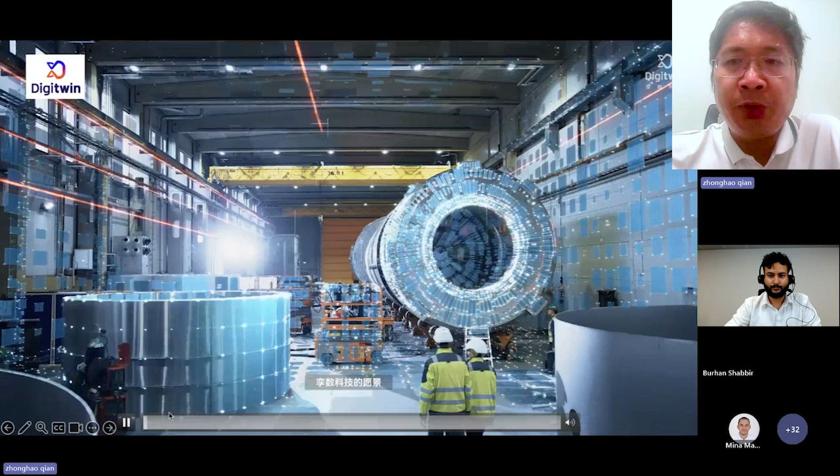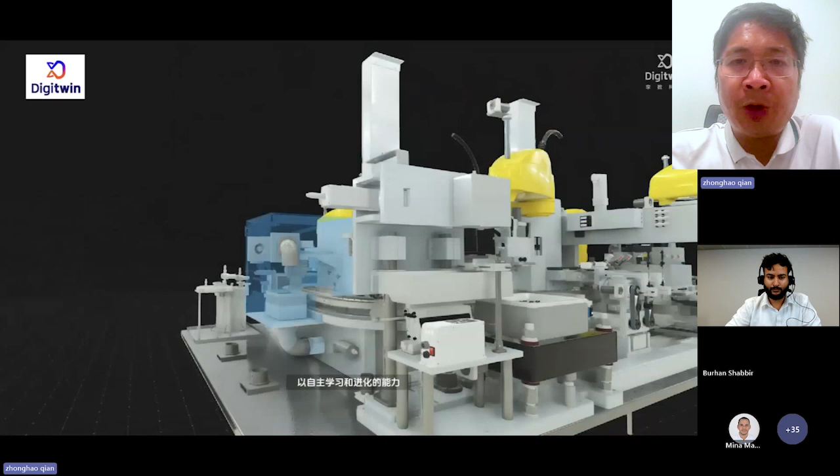First, a short video introduction on what we do, especially in manufacturing industries - within all the stages of manufacturing, from design, machining design, to operation, and also to sales. We provide different tools to create these applications easily and cheaply. This is basically what we did in warehouse management, in ports, and in oil and gas as well, and also on new concept validation with large language models.

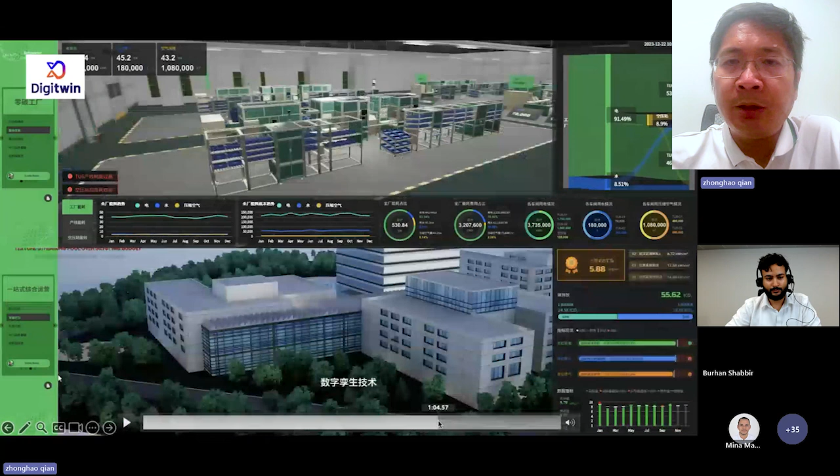We have included this latest cutting edge technology into our solution.

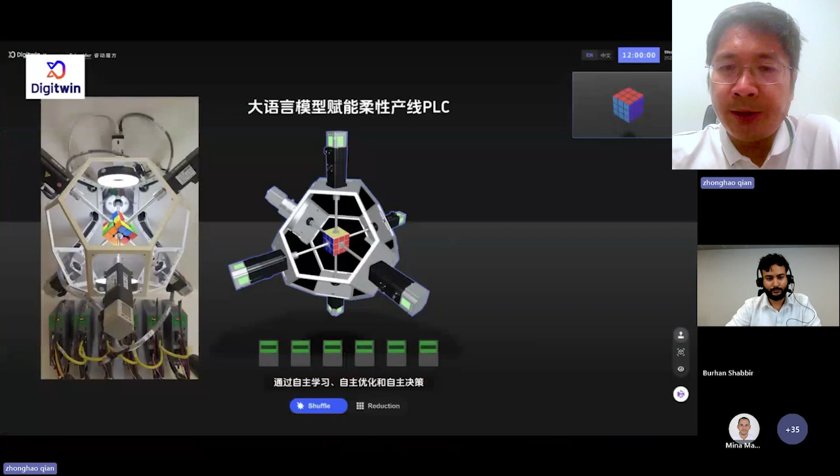My presentation will be separated into three parts. First, I will introduce the key features of our products, what a digital twin is, and what's the key technology behind it. Then in the second part, I will introduce our two solutions on oil and gas, and also on port operations. The third part will introduce some other cases, and our capability to execute international projects we have done in the past few years.

So first of all, the key features of digital twin technology. We have concluded this in four words: anytime, anywhere, anyway, to anyone.

With digital twin technology, you can experience the digital world at any time - you can replay the past with all the data, monitor the present, and also predict the future. You can also do it anywhere, no matter where your operations are, either in desert, in ocean, or in space - you can understand and manage everything.

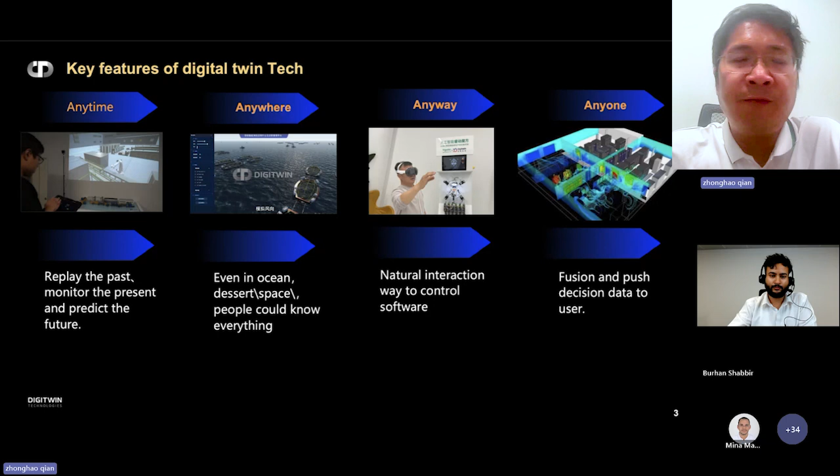And anyway - you can use different human machine interactions, including AR, VR, pads, iPhone, or the traditional PC - and also to anyone, so different people can have different interactions with the system depending on which level they are. If you are an operations person, you can have first-hand information, but if you are a manager, you can also have a more global picture of your operations. This is basically the key feature of digital twin technology, and we do it through 5 ways. First, we can sense through all sorts of IoT and other digital systems.

So we connect all these systems and compute with the help of simulation and mechanical models plus AI models, and we restructure this information into a more understandable way, so that different people can interact and collaborate on the same platform. We call it basically an industry metaverse.

So this is our platform, we call it the Twinverse platform. What we do is connect different types of data. I'll present in the next slides all the different types of data, and we construct this data into twin objects. This is the main key element of a digital twin. Basically, we call it twin objects.

Then people can interact with these twin objects through a 3D rendering engine on big screens, mobile, on the web, or in AR/VR. So basically, you can experience this data and these twin objects through different ways.

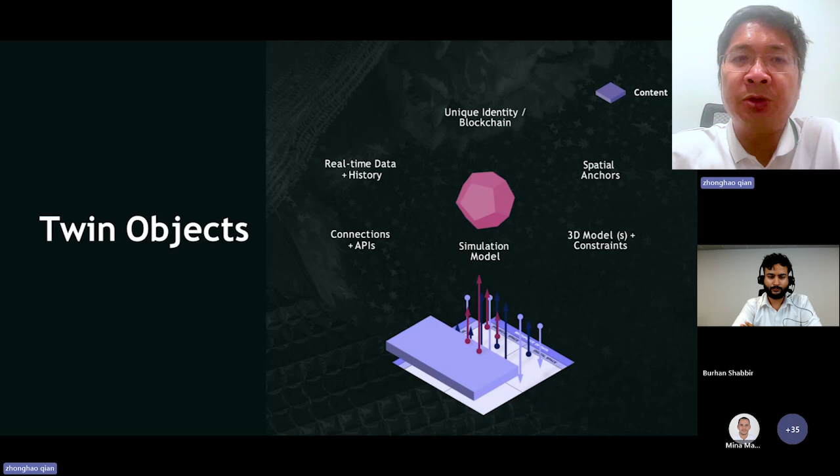Okay, then using our Twinverse platform, we have multi engines. So how we realize that people can use different devices to experience these digital twin projects - we have different rendering engines, like the Space engine, Flex engine, and Twin engine, which is our own rendering engine.

We can also integrate for more use cases like Unity or Unreal engines, and there are different deployment models, from client server, browser server, or streaming - like you can play it with videos.

So the purpose of all this technology is really to build a new spatial digital world by combining all these technologies to improve efficiency in the real world. So basically, we simulate all the stuff in the digital world, then we do the improvement in the real world, from, as I explained earlier, design to actual production to sales, marketing, and maintenance.

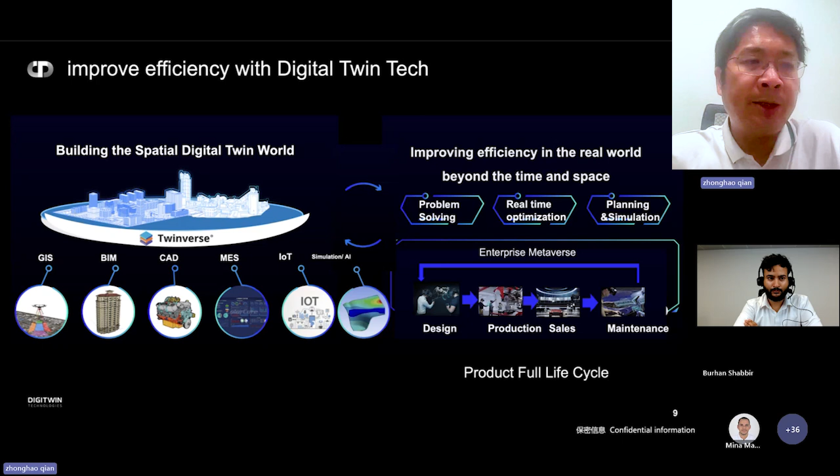Yeah, these are our main technology concepts. Coming back to our company, we are a leading provider in AI powered digital twin solutions in Asia.

Basically, we are headquartered in Shanghai. So since 2020 we have done a lot of international projects, especially in oil and gas and other infrastructure projects, to help our clients locally and internationally implement these digital twin projects.

And we have also been selected as a 2022 Top 100 Technology Startup by WEF, the World Economic Forum. So that's also quite a good recognition from the industry.

So our products, in summary, we have a platform project called Twinverse. The technology behind it I explained earlier in the first part, but we also have three main products that our users and clients can use easily.

So one is we call Quantum Foundry. People, our clients, can use this tool to create equipment-level twin projects easily. Second, Quantum City is more dedicated for large scale digital twins. We use this tool to create bigger things like oil fields, ports, or even city management. So we call it Quantum City.

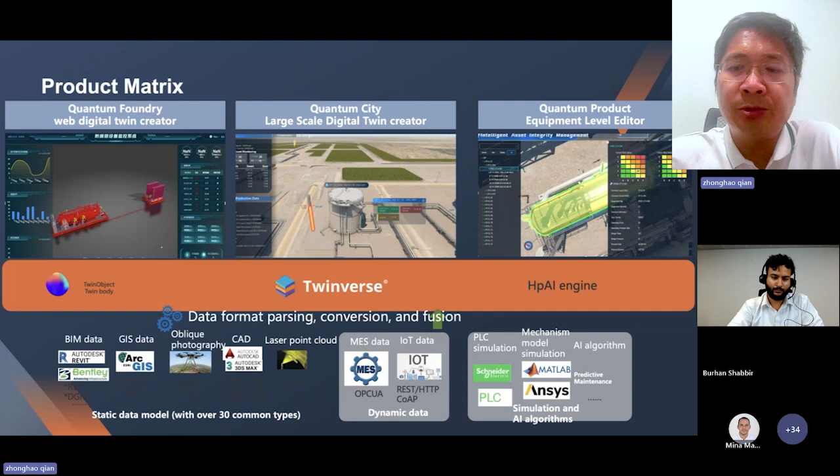Yeah, these are our product matrix, and we use these tools to deliver basically two parts. The first part is on the industry full life cycle, like energy equipment, railway, or marine equipment. So we can provide services from design to how people manufacture these equipments, to how they sell these equipments, and how they maintain these equipments.

This is one part. The second part of our solutions is basically for spatial complexes. So we do solutions in smart transportation, smart port, smart oil field, and also smart city. We can quickly do one 3D copy of the scenes or the spatial complex situation, and we connect all different data.

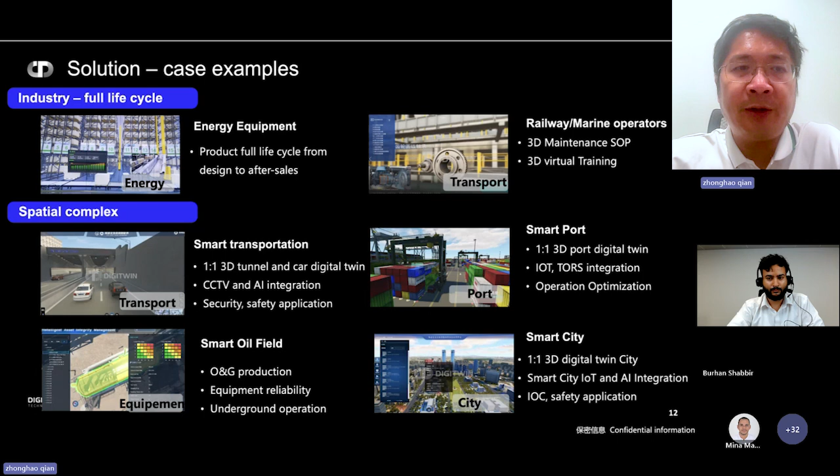Then we develop different functions for different applications, for example safety or equipment management, for efficiency data and analysis. So these are our products, the solutions we can deliver from here. Our clients include some European, some Chinese, and also some Middle East companies already, focused on equipment management, like port management or other industries, different industry types.

So for the second part, I will introduce the two solutions we have been working on with our different partners. The first one is oil and gas.

The complexity in oil and gas operations is, first of all, it's very big, as you guys all know. There are lots of different data developed by different operators, and it's hard to integrate into one platform. Also, the legacy infrastructure has normally been updated, but on the digital side, it hasn't been updated. Then we also have regulatory and safety challenges. These are the common challenges we faced.

We have developed solutions like surface and subsurface reservoir management. Secondly, we also did surface equipment management — this is also one of the topics we have today. We developed a whole solution on how people can manage their assets. Lastly, we also developed production and operation management, so people can enhance their operational efficiency and safety.

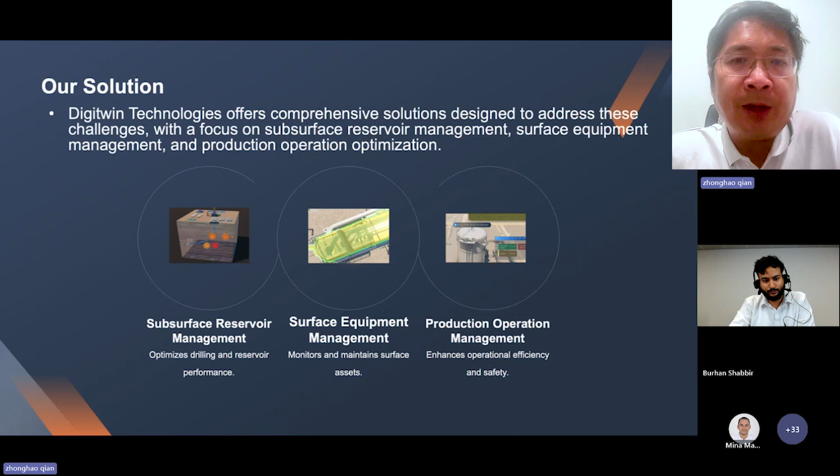I will go through the three parts of the solution, and there will be a small video we've done with different clients. First, we did this with PetroChina. This is one project in China where we've been helping them visualize the drilling process, and also integrate a simulation model to help them optimize their drill string combinations.

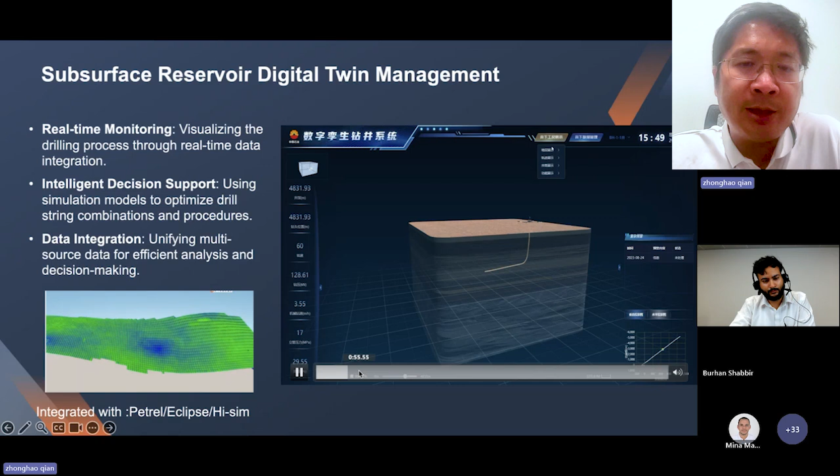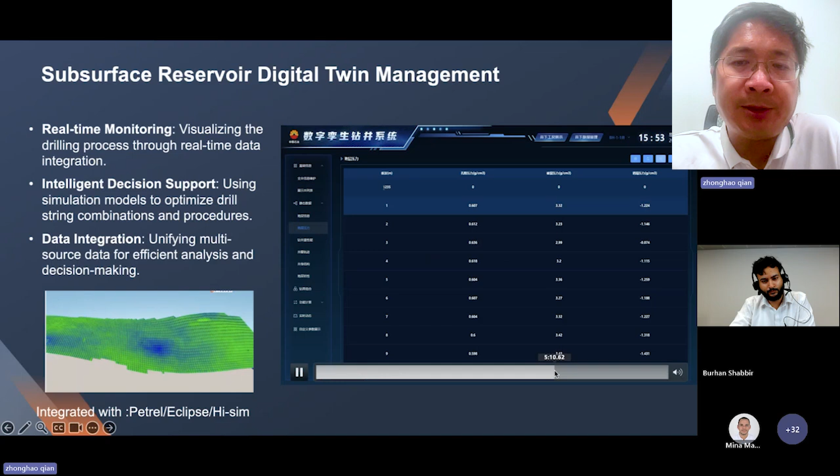In phase two, on the bottom left, we also integrated some simulation software like Petrel, Eclipse, and Hi-sim, which is PetroChina's own developed simulation tool. In this case, they can know the real status by combining these simulation results with their actual drilling process.

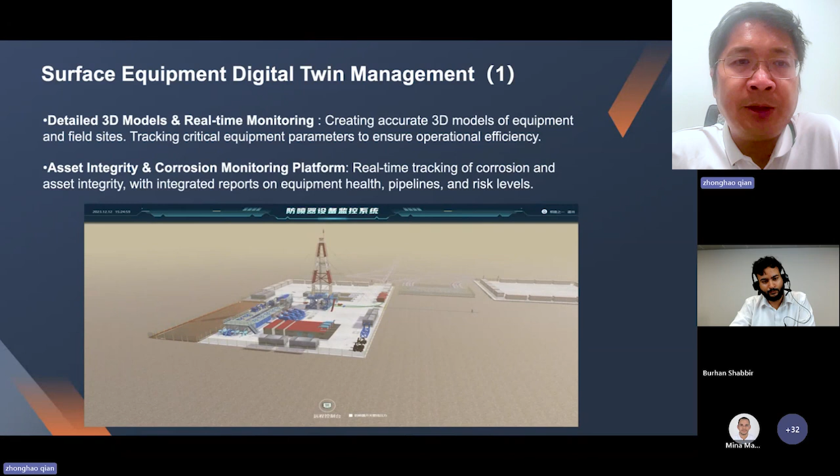The second one is on surface equipment management. This is also one project we've done with PetroChina. We helped them create 3D drilling facilities on the surface, and also monitor key equipment performance.

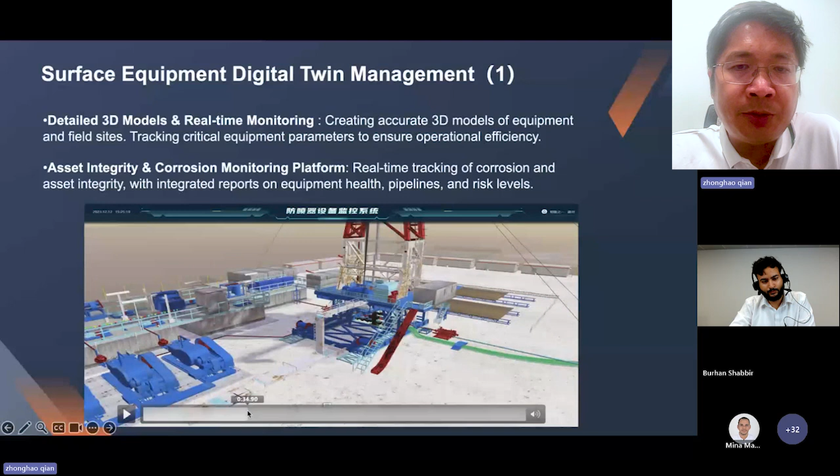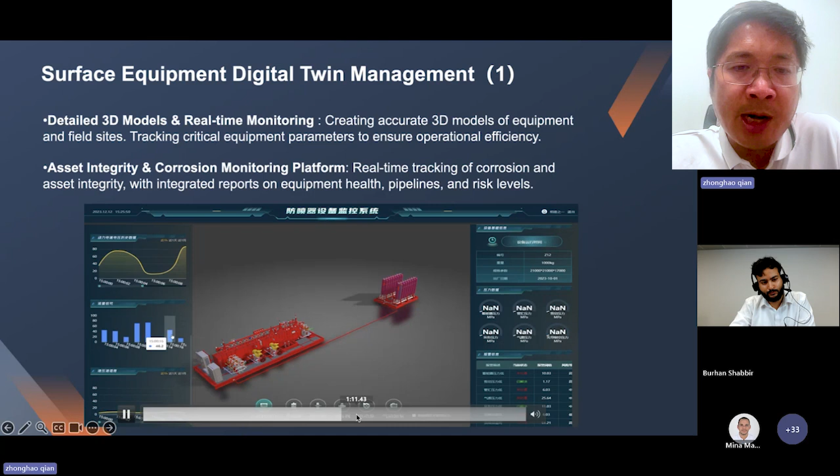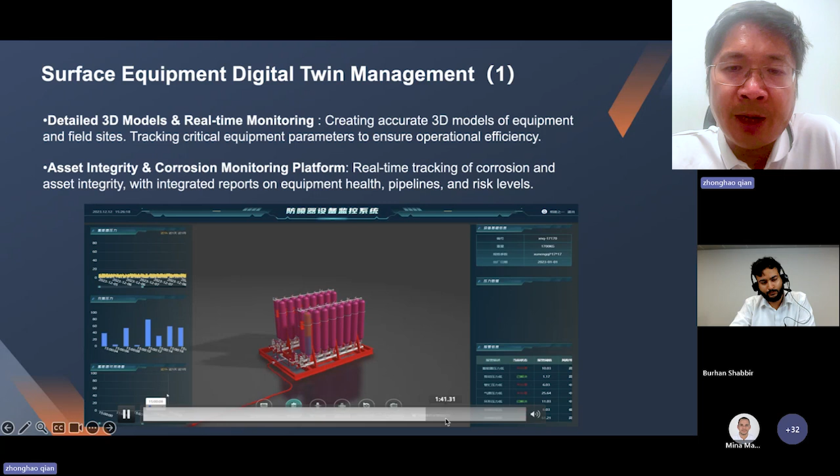We connect all the data — it's not only a 3D representation, but we also connect the IoT data to see it in real time. If there are failures, we can see it directly from here and locate very quickly on the equipment itself to see what's happening and what's the environment behind that. You can also see the movement of different parts if it's working.

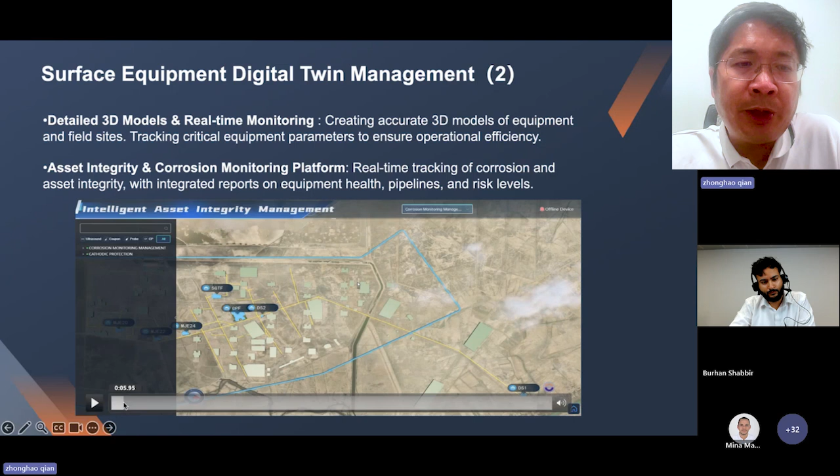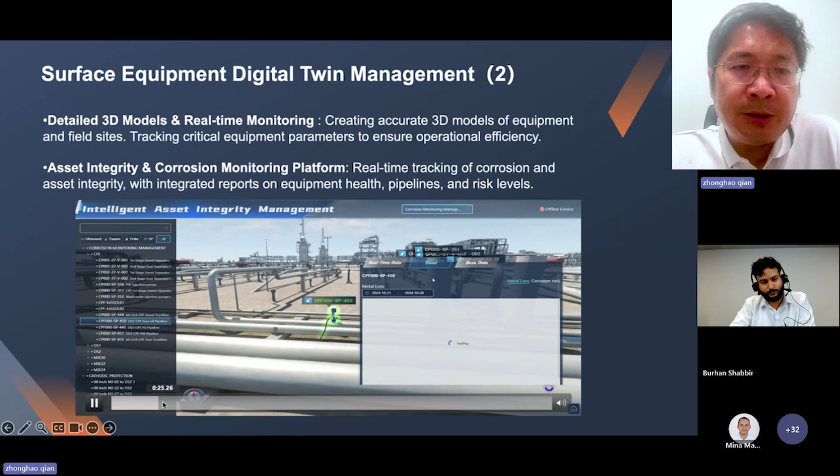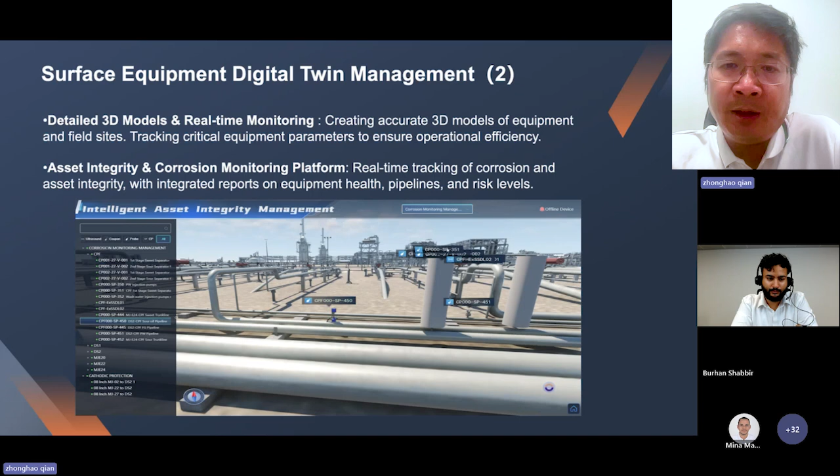For a second example, we worked with one of the oil fields in the Middle East to create a 3D asset integrity system, and also a corrosion monitoring platform. We connected all these IoT devices into the system, and also rebuilt basically a 3D model of the oil field equipment, the key equipment.

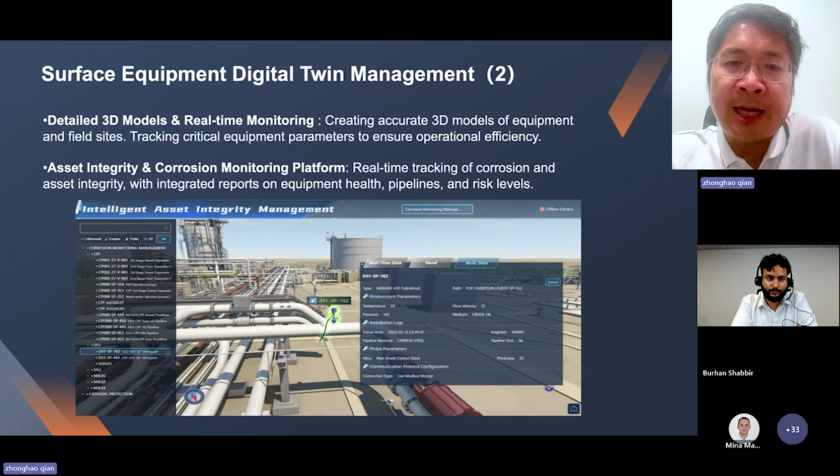Their operation and maintenance people can use this platform to track not only the current data but also the trends in corrosion data, to have a forecast of what's happening. Then they can decide their work with the support of this system. We also combined all the risk analysis into this system.

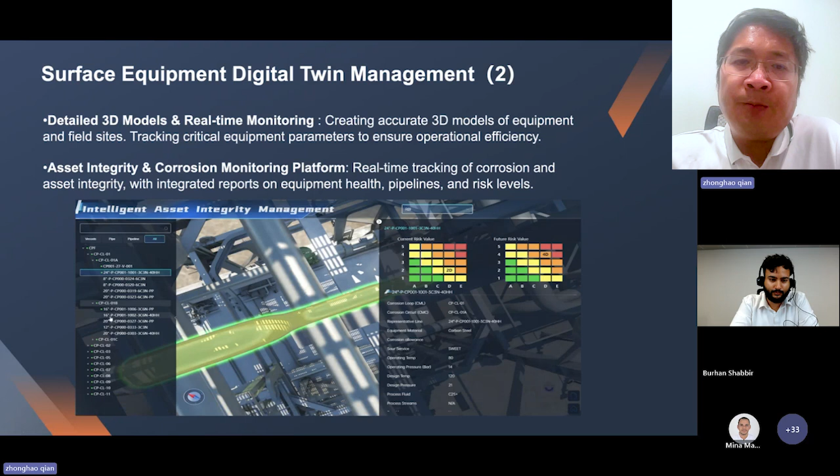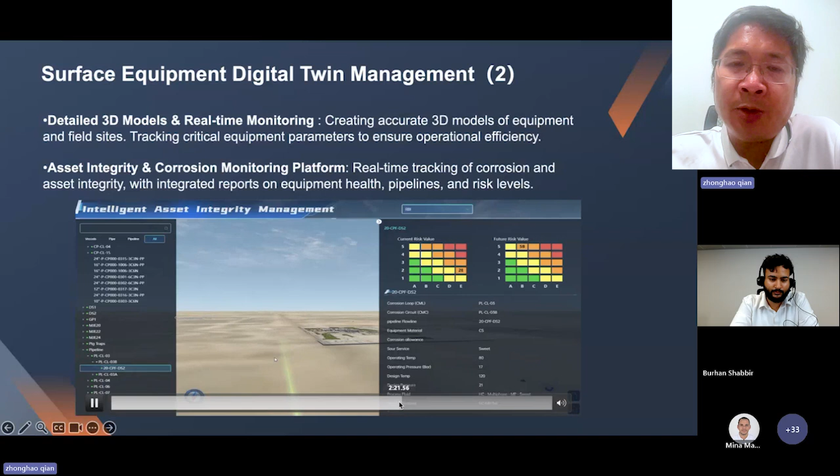It also helps them when they have overhaul or maintenance work — they can use this system to track whether the reports are on time, and what the meaning is behind the data and what points to focus on, using this system to really improve their daily inspection and repairing work.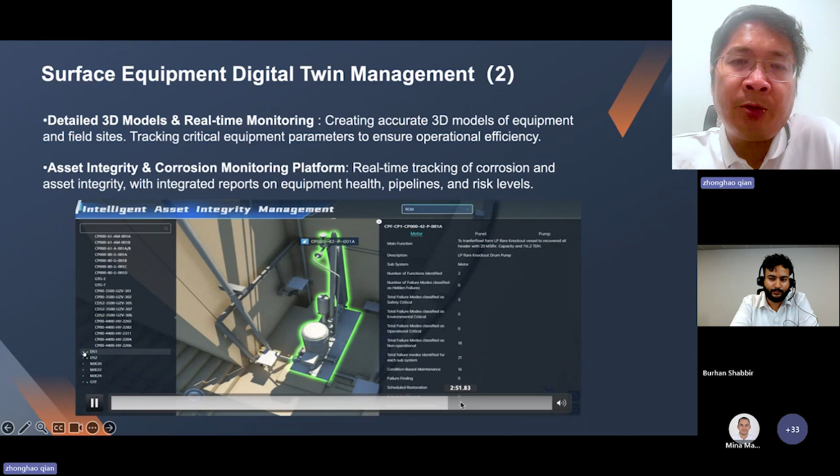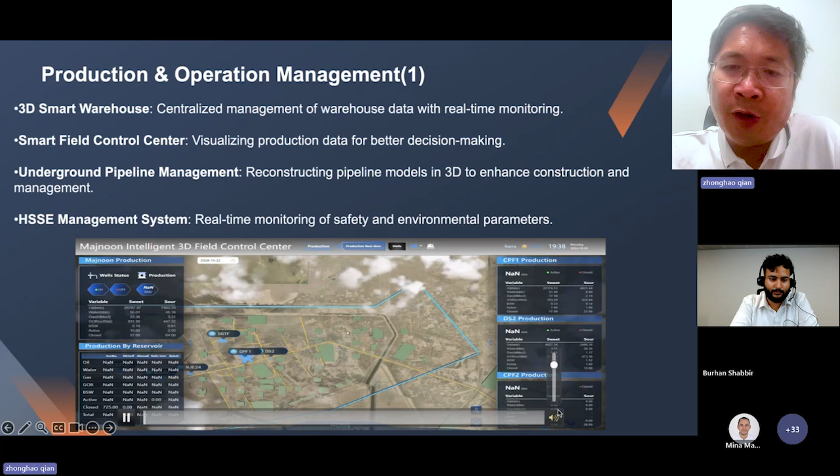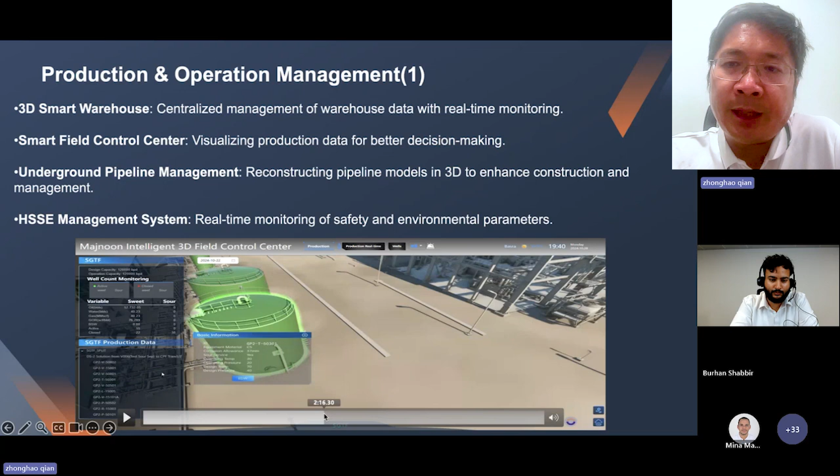And then also on production and operations — because an oil field is very big, you have different data from different departments. So we also helped them build what we call the IOC, the intelligent oil field command center, so they can combine different systems into one. Then you can locate and focus on solving a problem very easily, because you have the equipment data, the production data, and also the logistics data — for example, if you want a repair or spare parts.

You can also see from this system whether you have issues, because it's linked to the spare parts warehouse management.

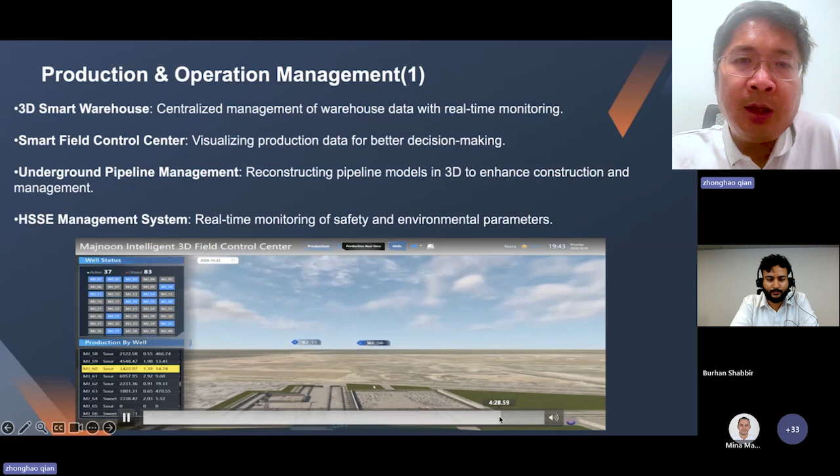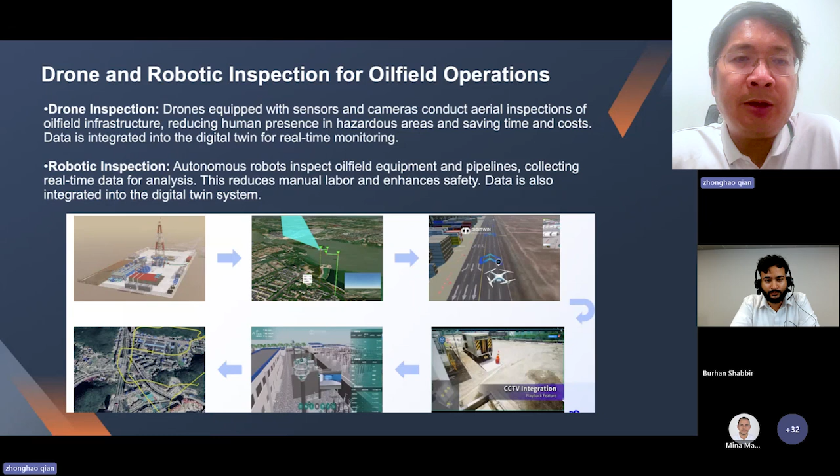As Burhan explained, we also use drone capability. We've worked with our partner in China to do drone and robotic inspection for oilfields. For areas the robot cannot pass, we use drones. So it's basically a combination of two solutions. It can replace personal inspection work three times over—every two times we send these machines, and the third time we use people to verify. This really helps reduce labor cost and improve efficiency and reliability of the system.

Above is a few examples we did on the oil field.

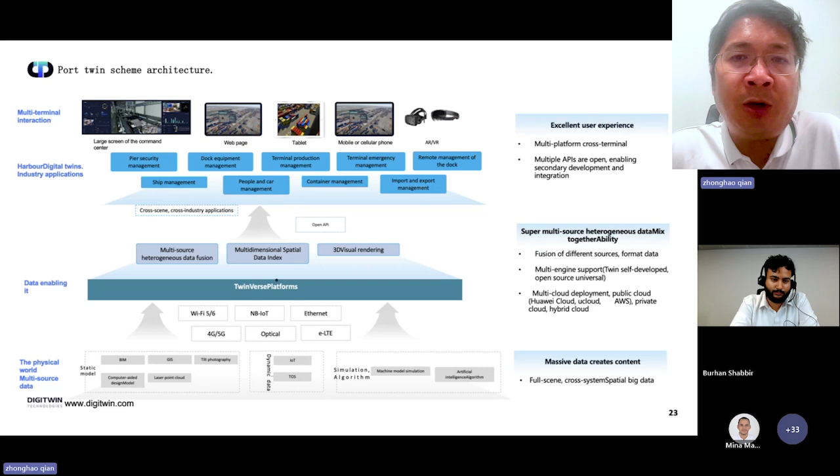The second part is the smart port solution. I'll go a bit faster on that. This is the structure of the port solutions—same principle. We use the Twinverse platform as a data platform to combine different data from the ports, including the ship and fields utilization, also what we call TOS, the port management system, and then we create different applications for the IOC, web, PC, or AR/VR for different purposes.

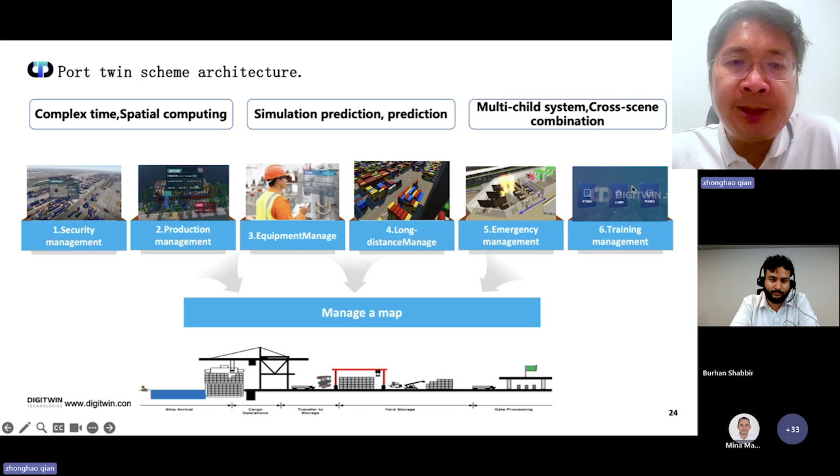One key function we developed is security management, using integrated cameras, then production management because all the equipment is integrated, then equipment reliability management, and other systems like ship system, emergency management, and training system, all into one app.

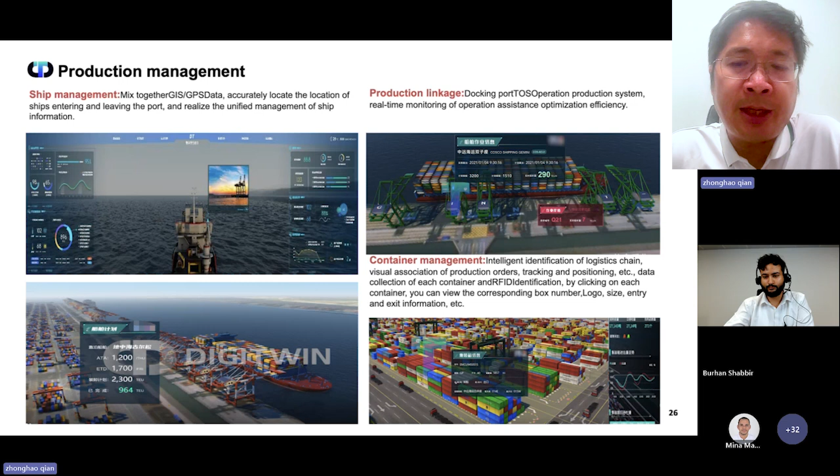So people can manage their daily operations much more easily. For equipment management, it's quite close to what I mentioned in oil and gas—we have different machine monitoring systems combined into one digital twin system, so different people can manage cranes or automatic trucks on the same system.

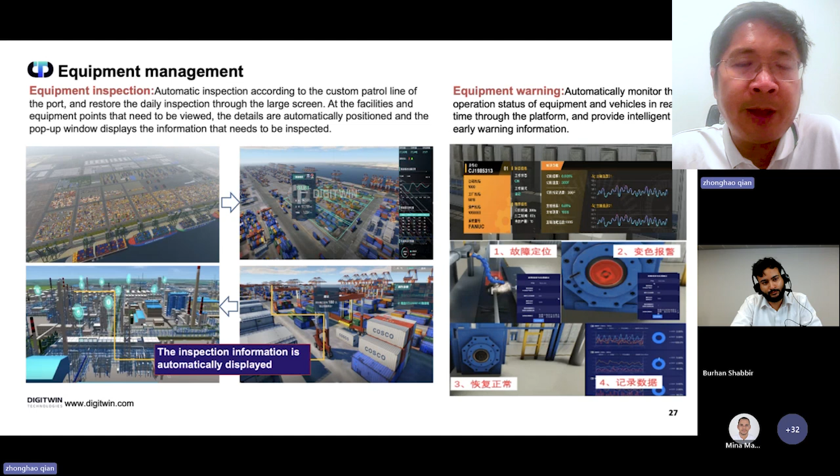So I've shared a few examples on ports—we've done three projects in China and one in Singapore. We're also discussing one project with Malaysia. We have strong international implementation capabilities ourselves, but we've also partnered with ESBAAR and other strong IoT companies in different regions so we can develop projects.

There are a few projects I'll go through quickly. One is a water treatment plant for the Singapore government—we've developed seven similar projects on PUB water treatment plants to help them create a digital twin, mostly for monitoring and safety management. The second is the oil field I explained earlier.

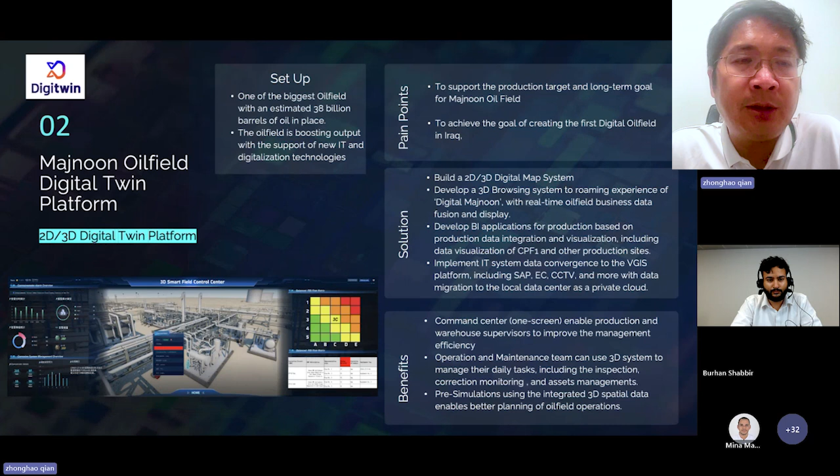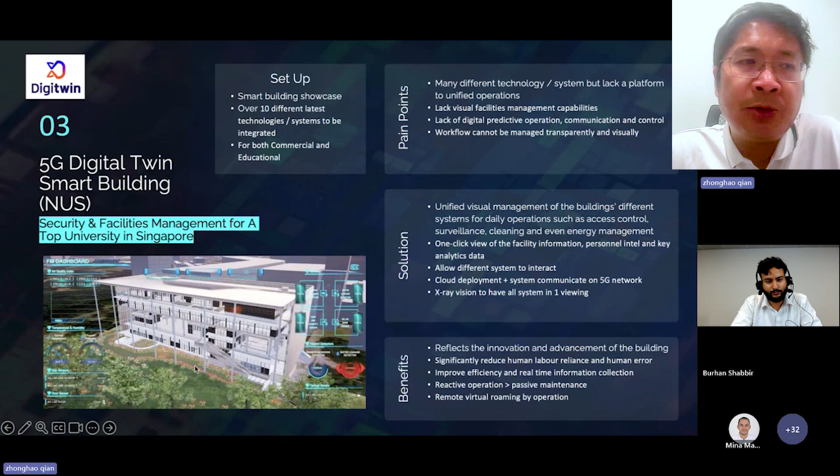The third is a partnership with NUS in Singapore to develop a 5G digital twin smart building—not just a building digital twin, but combining machine and robotic functions inside, so people can experience a real digital twin. We've also worked with Changi Airport to improve an internal map system, which is basically a 2D digital twin. So digital twin isn't only 3D—we can also have a live 2D upgrade on these digital twins.

These are a few projects we've done in the past few years, also accessible on YouTube—we'll share that with our partners later. At the end of the presentation, I'll also show you a real demo we did with ESBAAR during the exhibitions or PES. In the meantime, you can ask questions while I share the video.

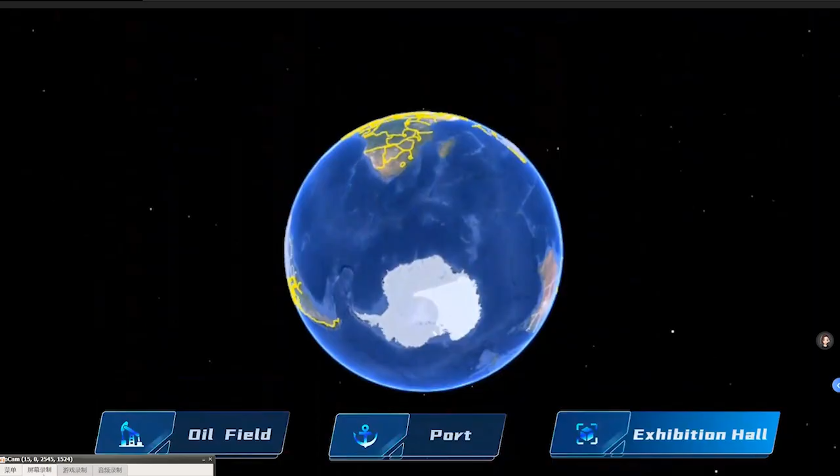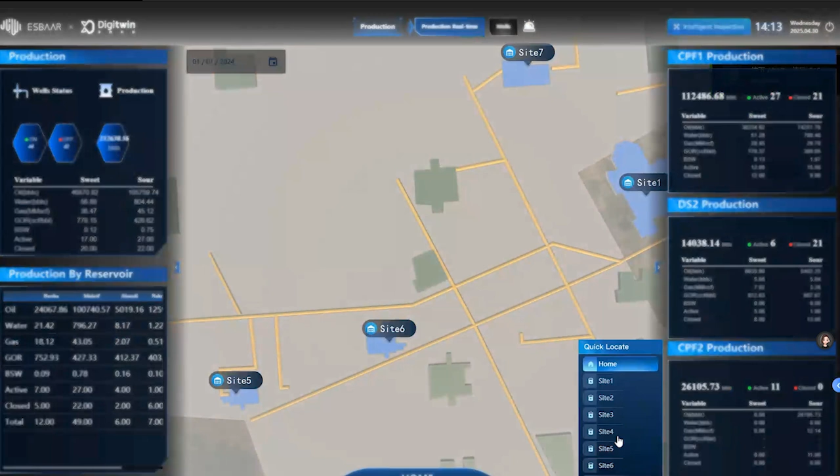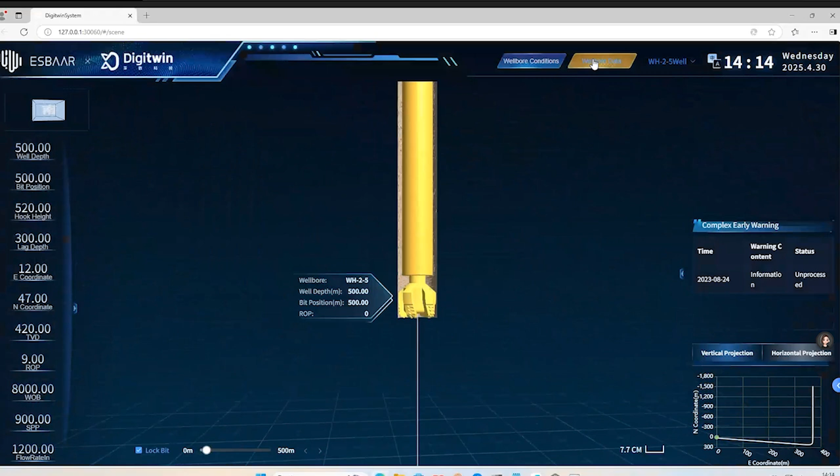Basically, some of our concepts—let me start from the beginning. We've received a lot of questions and attention from this show, so we've combined two real-time data demos: one for oil field, one for port. I'll leave this video playing, and if you already have questions, we can discuss now. That's all from my side.